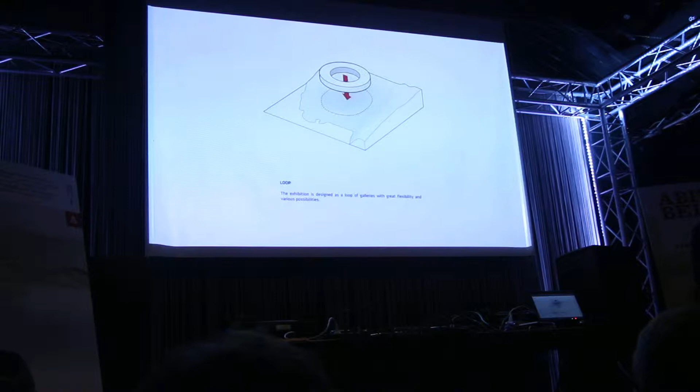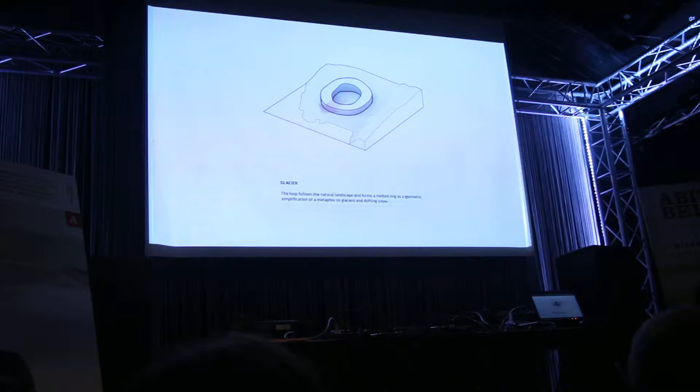What we try to do is make the smallest possible courtyard building, capturing a small fragment of outdoor space for a sculpture yard. But instead of ignoring the landscape, we really follow it, so it becomes this sort of melted circle that also opens the courtyard towards the view. It's completely protected from the outside, so we can move it all the way into the elements.

By following the topography, it lifts up gently, inviting people to enter and go into the museum. You have this sort of Guggenheim-like sloping gallery of paintings that takes you down to a perfect circle that has a series of very generous galleries.

But maybe the most political statement is that as soon as you enter the museum, because of the melted circle, it creates this framed view of the Greenlandic landscape—the fjord and the mountains and the iceberg in winter, the Greenlandic nature, the Greenlandic sculptures and artworks inside. But everything Danish has been completely eradicated from the view, so it becomes an oasis of Greenlandicness in a city completely dominated by Danish heritage.

That brings me to the last series of projects we've been doing, which represents something I think is almost a general tendency in architecture: the infrastructure of the industry of the past always gets reinvented as the framework for the cultural and social spaces of the present.

A typical example is a city like Park City in Utah. It used to be a mining town for silver. This is the Coalition building where the silver mines came down. Basically, when the silver mines dried out, the same lifts started going the other way, taking skiers up the mountain, because the first ski lift in the world was a repurposed mining lift.

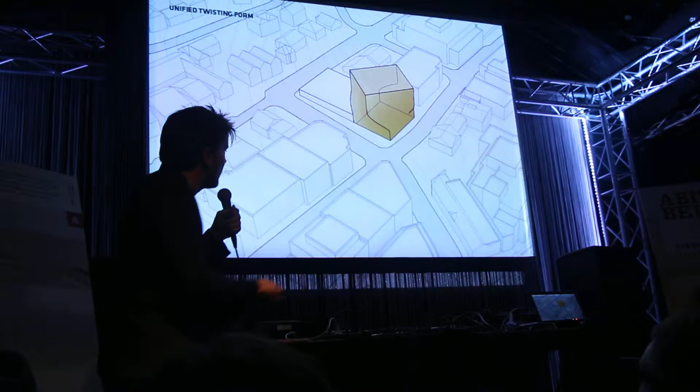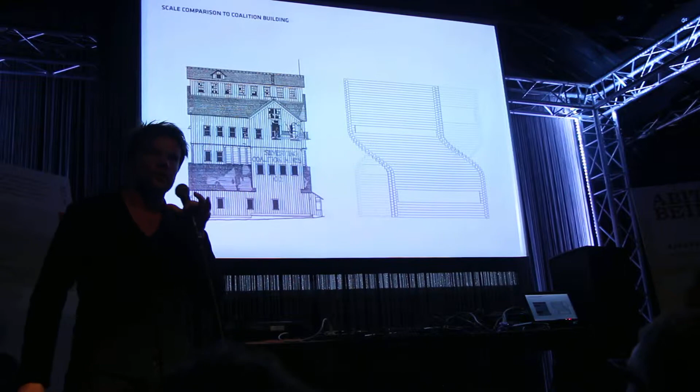It also magically recreates the proportions of the old Coalition building. So even though it's taller than all the neighboring buildings, it somehow reawakens the ghost of the past. And we thought: how can you make a new building in such a historical city?

The immigrants who went to Park City were mostly Scandinavians, and they brought with them this idea of log construction—interlocking logs that they used for the mining shafts and for their buildings. Now they have sort of perfected this construction technology. Even the Indians, the Navajos, use solid timber to create these complex shapes.

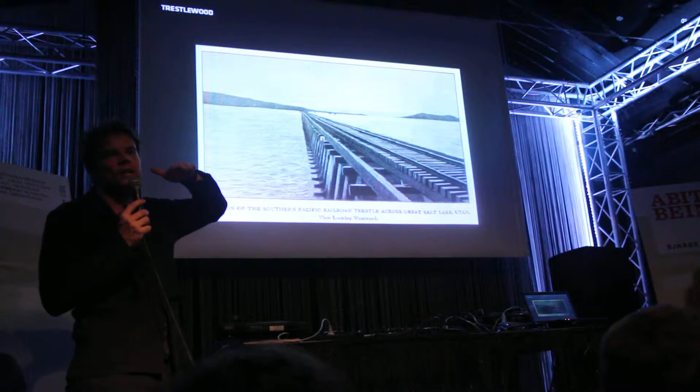Finally, when the Pacific Railroad went over Salt Lake, it was piled on these big wooden piles. Now they've taken away the tracks, and now they're taking out the piles. Because they've been marinating in salt for decades, you can actually use them—they become this very beautiful type of wood.

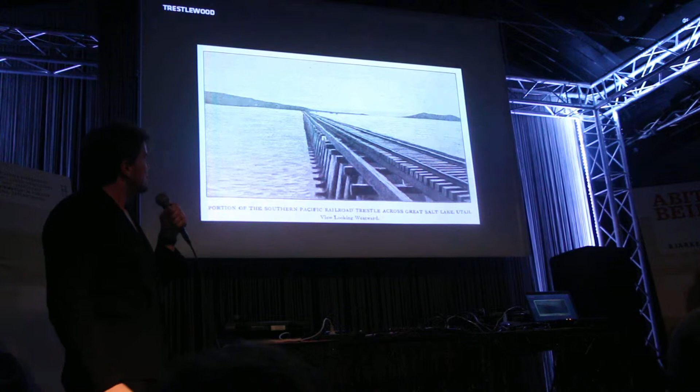So we proposed to take all these elements of the history of Park City and build the museum like a log cabin, using the thickness of the wood so it's thermally insulating, structurally load-bearing, and can even do the complex geometry of the turning building.

All of the circulation follows the timber. So when you enter the building, you follow the timber and the light. You move up across the galleries. This is the restaurant that opens onto the roof of the garage, and you continue to the top.

In a way, the project becomes for Park City the cultural town what the coalition building was for the mining town—a typical example of how the idea of infrastructure can be reinvented.

Right next to Prince Hamlet's castle, Kronborg, in the north of Copenhagen, Kronborg has become a UNESCO World Heritage site. It's almost impossible to build anything in Denmark without being next to something UNESCO. The Danish Maritime Museum used to be inside the castle, but once it became UNESCO, they had to kick it out, and it was suggested to put it inside this dry dock.

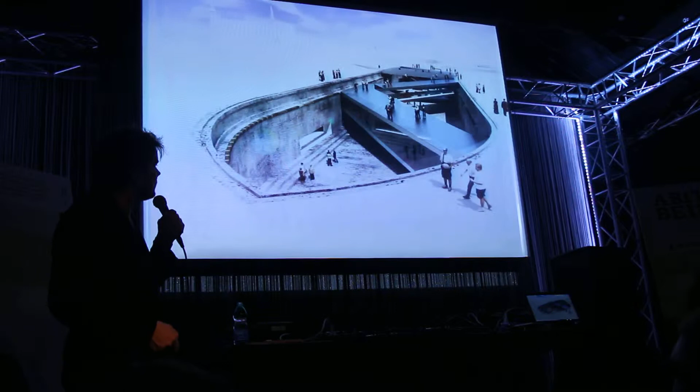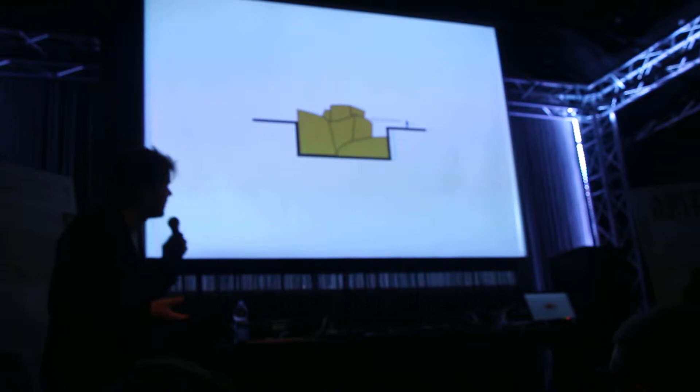There was a dilemma: UNESCO said we had to be completely invisible, but the museum's sponsors wanted some kind of architectural masterpiece. So making a void would be the way of combining invisibility and exposure.

A series of bridges takes you down into the museum, which has galleries, auditoria and restaurants inside, bringing daylight into this underground basement.

Essentially, you have the long spans and the raw steel that ships are built out of, and the old dry dock with the raw concrete where ships used to be built. So all of the technology and infrastructure of shipping becomes the framework for the museum.

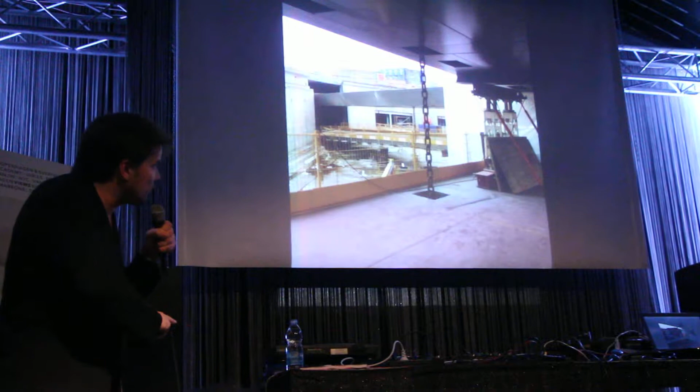An interesting side effect: the bridge has a handrail that makes it very strong, so it can span quite long while the underside stays very skinny. This is possible because the underside is suspended in an anchor chain—so the entire floor you're walking on is actually hanging from the roof above you.

I noticed that it seems like all of the work we're doing in Denmark is underground for some reason. We're doing a sports hall in my old high school—it's underground, and we try to make it as little underground as possible.

It's a handball arena. Handball is a Danish sport invented by a soldier, and you need 4.5 meters at the edges and 8 meters in the middle.

My math teacher gave us the commission, and as a way of demonstrating that I actually got something out of high school, we designed the curve based on the mathematical formula for a ballistic arch—what you call gravity's rainbow.

Essentially, you have this undulating roof of glulam beams, completely shaped by the curvature of a handball.

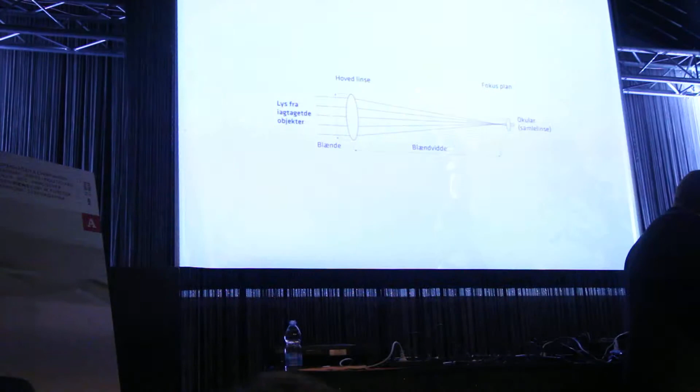I mean, it's 11 o'clock, it's Friday. We should be drinking and dancing, not talking about architecture. But...

So maybe I'll finish off with the last example of social infrastructure, trying to start using the idea of a hybrid between cultural programs and infrastructure proactively.

We got invited to do a sculpture park in the north of Norway.